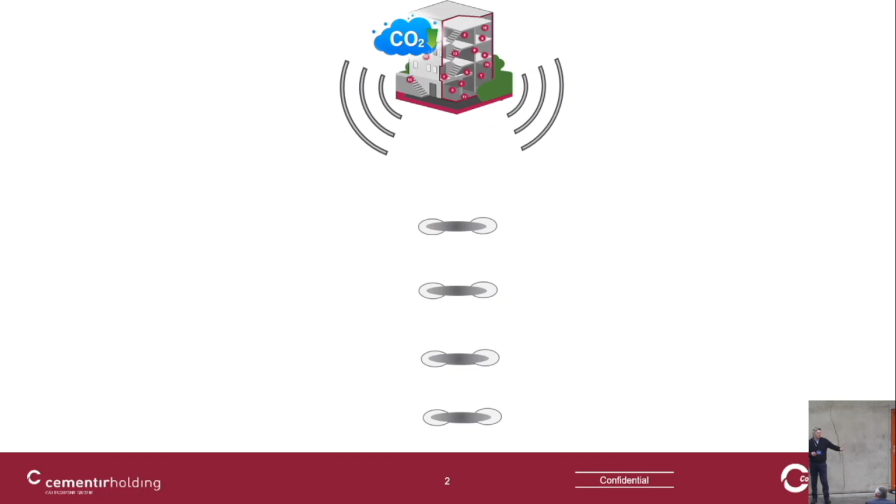Yesterday we understood that the key point is actually to reduce the CO2 emission per square meter in the building, and we can say our approach has two potential solutions.

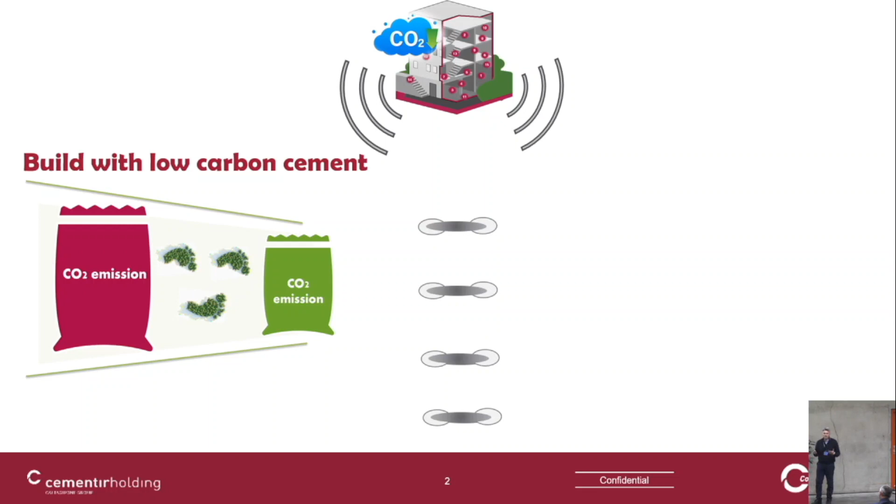One solution is simply to build with low carbon cement, reducing the CO2 emission per cubic meter and then per square meter by reducing the CO2 emission in the cement. The concept of 2A-LL cement, which will now be presented by Soren, works this way: we can have the same amount of concrete for a foundation, a slab, or an aesthetic wall, but using a cement with lower carbon.

So potentially we'll have lower carbon cement and lower carbon product. This is what we've listened to our customers to do - switching from CEM1 to CEM2, adding slag or so on, to get a potential CO2 emission in the binder lesser than before, while keeping the same material quantity.

The other concept is to build more with less material. In this case, the idea is to reduce the material itself, achieving higher strengths like with UHPC instead of traditional concrete. Instead of having a wall with a thickness of 35 centimeters, we could have a wall with 10 centimeters, and this is very important because we save the mass of the material.

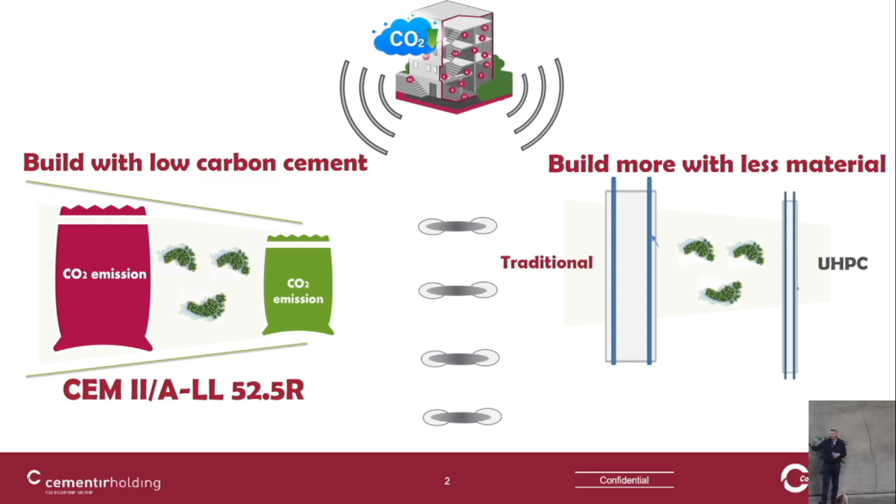So from the building point of view, the precast point of view, there's less CO2 emission per square meter in this case. This is the key point. There will be another presentation focused on the innovative solution based on UHPC - a solution pointing to saving material with better performance.

In our point of view, the first part is based on the customer, or based on us - we need to serve you a cement with lower carbon footprint that can suit your application, with a sort of fine-tuning to your production. It's an easier way and can be handled here.

The second one is more on the engineers, the final user, because you can save a square meter, but there's a calculation based on engineers, and the concept of building design. So it's more on the prescriptor - we need to go up.

In this case, it's more lobbying from the initial value chain going down. This is our way, as Michele mentioned before, to address sustainability. On one side, that's scope 1 as mentioned by Michele, so more on our side, to deliver a competitive product to you.

The other way is more a lobbying together with the customer and the prescriptor, to define a different way to design the concept of a new building. On both sides we have the cement, and also our InWhite solution that will be shared with you after lunch.

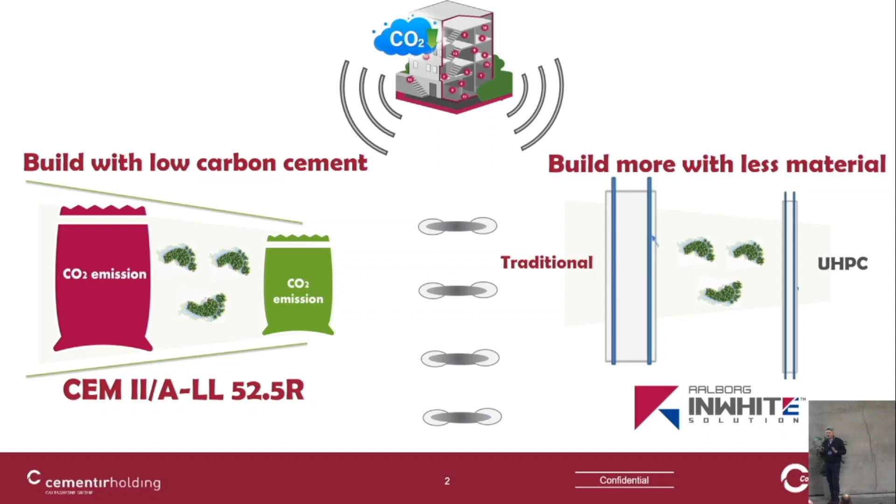We can do a lot of testing on mortar in our lab, according to the standard, but the reality is that the cement should fit into your production process.

Let me start by introducing myself. My name is Søren Rasmussen. I have been employed here at Aalborg Portland, and now Cementir, since '92, being part of our company's transition from a small Danish company to an international company. And now we are in this transition, this journey towards net zero CO2.

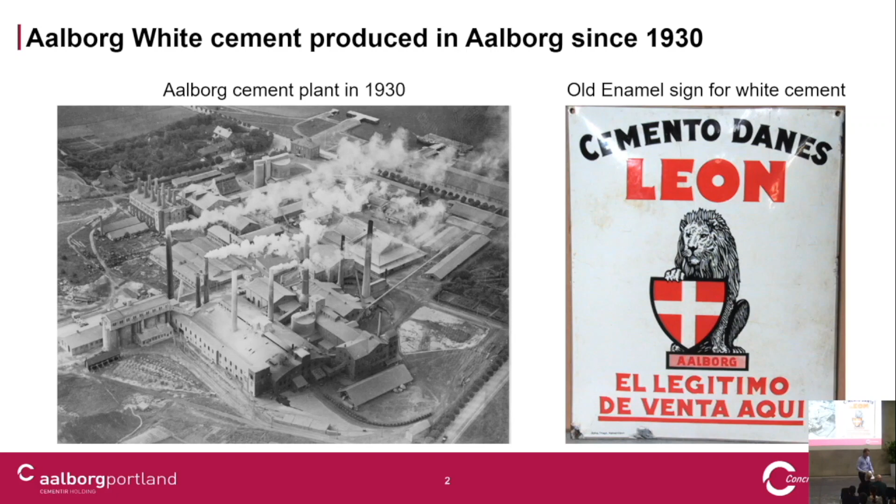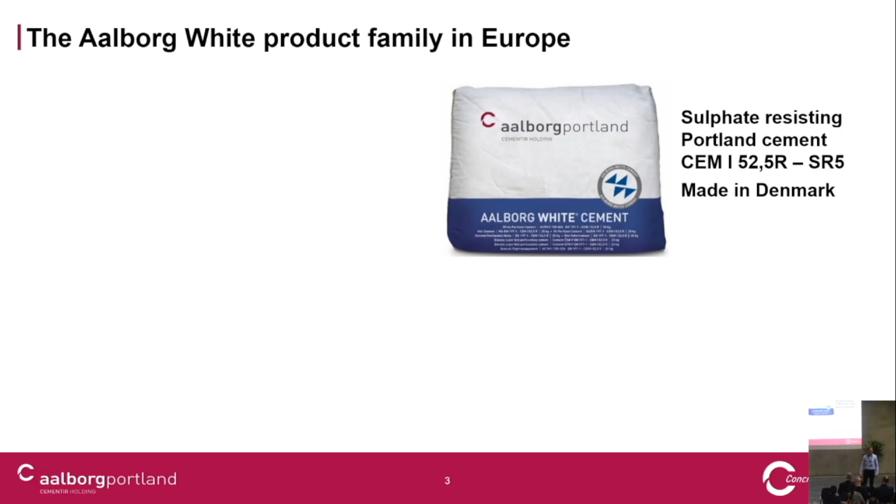Here at our plant today, we are producing the authentic Aalborg White cement, CEM 1 52.5R SR5, sulfate-resistant white cement, as we have been producing in that composition for at least 50 years, I guess. We also now supply white cement from Egypt: the CEM 1 52.5 and also a CEM 2B cement. And coming up next year, we are proud to supply you also a CEM 2A limestone cement, produced on the clinker we have here in Aalborg. So my presentation today is regarding the cement based on the clinker from Aalborg, not the Egypt cement.

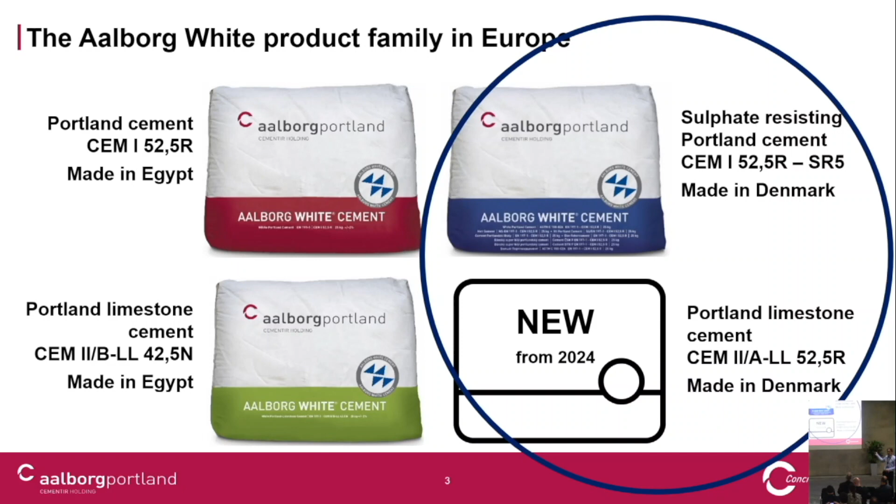What is unique here is our raw materials, and they are wet, as we learned from Michael this morning. We have wet chalk, and therefore it was also a wet process, but that fits our production best. We have wet kilns, meaning we supply the raw material in a slurry, poured into this long tube of a kiln, and that's how we produce the white clinker.

We can compare that to the dry kiln process, which is our grey production here, a dry or semi-dry process. Those two processes are different and have different benefits and disadvantages. With the wet kiln process, the disadvantage is the very high energy needed compared to grey, which is more energy efficient, and that's a huge disadvantage. But we also have benefits from the wet kiln process—the raw feed is in a slurry.

That means that we have all the raw materials, all the fine raw material particles, very intimately mixed together in suspension. So the feed into the kiln is more homogeneous than if we have powder raw meal fed into the kiln. In the wet kiln, we form very nice spherical nodules of uniform size, whereas in the dry kiln, we have a much more dusty clinker coming out, meaning that the sizes of the clinker are from dust to maybe bigger balls.

We have a long retention time in this kiln system. From entering to exit, it takes something like 6 hours for the material to go through, whereas in the dry kiln, it takes half an hour from start to exit. I'm tempted to say that we all know that slow cooking gives better food, and that's also the case maybe for our clinker, I hope.

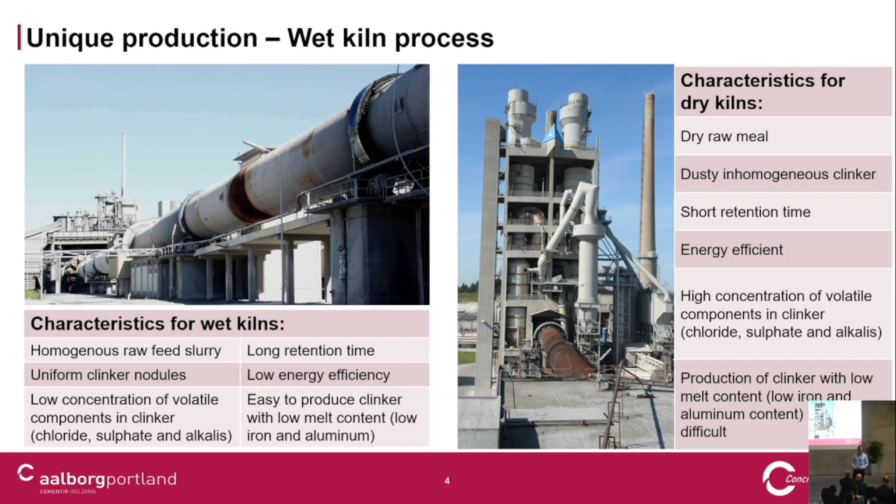And we have no iron in white cement, in white clinker. And in our special clinker, we have a low C3A. And that's only possible because of the wet kilns. So this is to show you an example of how it looks. Wet kiln, dry kiln, the clinker coming out here.

You should not compare the color, but you can compare the size. You can see here that these are small spherical clinker, not the same size, but at least a similar size. Whereas these clinker, which are from our Egypt plant, which is a dry plant, we see much more dust and also bigger clinker nodules than over here. And that's a difference. This is only possible in a wet kiln.

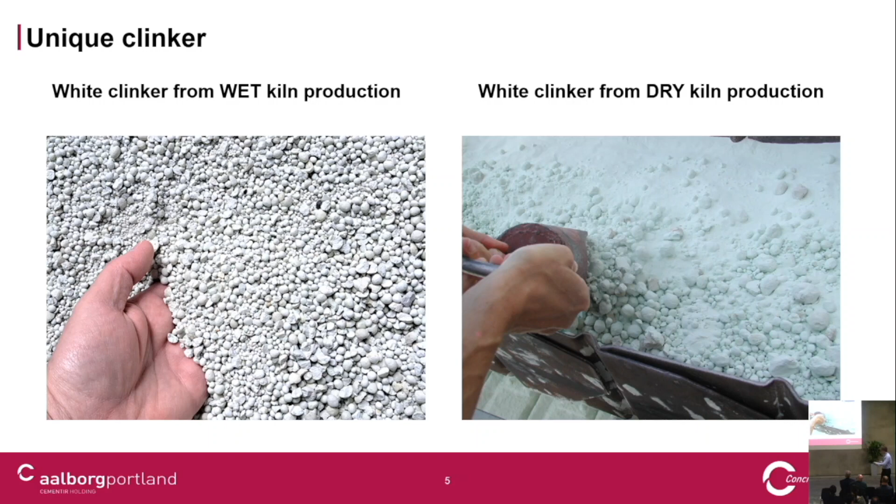And that's bad, but we have learned, Michael told us this morning, that we have a heat recovery system at our plant, so we actually recover 25% of the energy put into the kiln. So even though we have these wet kilns, our total energy balance is not that bad. And our EPD for the cement is not as bad as it would look at first glance.

And we produce gypsum, which is reused in our grey cement, recover the heat used for domestic heating, and also the dust from the white kiln with all those volatiles, high in alkali, high in sulfate, high in chloride, is also reused in our process.

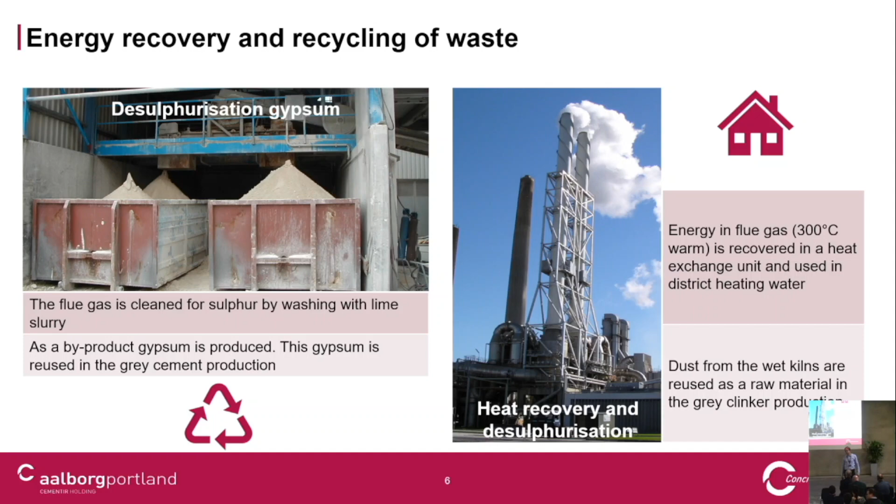So the byproduct gypsum, does that provide all the gypsum for Aalborg production? No, it's not enough. We use natural gypsum and we use desulfurization gypsum like this. And we also get gypsum from the power station nearby here. How much of your gypsum would be from this, approximately? I'm not sure about the number. 50%.

So that's the clinker. And what are the key properties of these clinker? Because of our process, high whiteness. Because of the uniformity in size, we can have more control of the heating, the temperature profile through the clinker, and also the cooling of the clinker is important, that we capture the high temperature phases and quench very quickly. And also the oxidation that is happening on the clinker. The iron is locked in a state where it has no color. Very small amount of iron is in there.

If it is oxidized, it turns black, and we don't want that. So it's important with the size of the clinker. Give us high whiteness. We have a very low C3A content. That's possible because of the technique. So we have a sulfate-resistant cement. Of course, we have zero iron phase. Otherwise, we will not be white.

We have a very high content of calcium silicate. That is the minerals that are giving the strength to the cement. Because we have no C4AF, we have very little C3A. Only what is left is calcium silicate. So that's why we can have much higher silicates contents than in a normal grey clinker.

Extremely low alkali content. When we say low alkali in Europe, you think about a cement that have 0.6 or less percent of alkalis. We have less than 0.2% of alkali. Extremely low chloride content is less than 0.01.

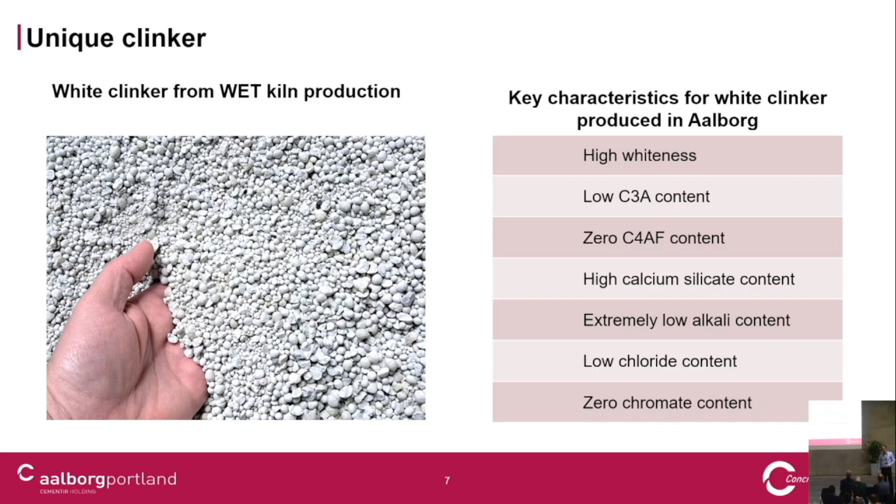Also, this is not because of the kiln technology, but we have zero chromate in this cement. That's because of the raw material. So there's no need to chromium neutralize our white cement. It's born without any chromium. So that's unique.

And if you look at the composition of our clinker, and see what does it do to the cement properties. Cement based on these clinker will have high strengths, especially the 28-day strengths will be high because of the very high content of calcium silicate and the low alkali. That give high strengths. The white cement on these clinker have more than 70 megapascal usually in 28-day strengths, and that's higher than almost every other cement.

The low C3A, that allows us to have a sulfate-resistant cement. The low alkali content, that allows us to have a cement that never will have harmful alkali-silica reaction. You will not see it with the white cement.

Also the low alkali, well, this is maybe a small thing, but when you have a cement which is sulfate-resistant with low C3A, you normally say, okay, but that cement is not good when you put it in seawater because it will not bind chloride because there is no aluminum to bind the chloride.

But it's not the truth here because with low alkali, very low alkali content, that changed the balance between how much chloride is in the pore solution and how much is in the silicate phases. With a low alkali, more chloride is bound by the silicate phases. So actually this cement also have a good chloride binding capacity.

Low C3A, low alkali, no C4AF. That means that this clinker in cement gives us a cement which has a very good affinity or very good compatibility with the superplasticizing admixtures.

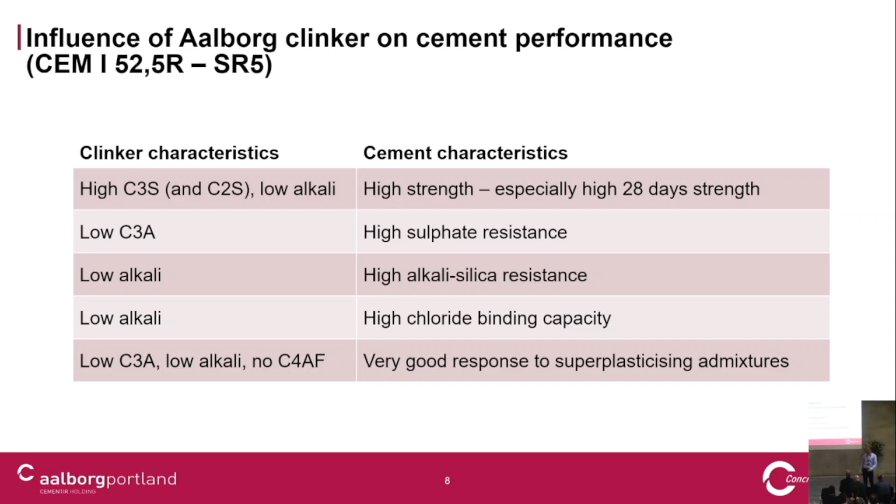You will see that when we try to compare concrete with our white cement with any other cement more or less, that you can always reduce the amount of superplasticizer needed in your concrete, very often to half the amount of superplasticizer. So instead of putting 5 or 6 or 7 kilograms per cubic meter of superplasticizer, you can go down to half and have the same fluidity, the same effect of the superplasticizer. And that effect we have tested in the laboratory.

This graph showing water-cement ratio in a concrete, and here it shows the dosage of a superplasticizer. And this is different cement, and this violet color is the Aalborg White from Denmark. The others are also white cement. But you see, these concrete are different concrete, but with the same flow, with the same consistency. So all the points here are representing a concrete with the same flow spread.

And if you have no superplasticizer, you need a lot of water, a high water cement ratio to have a concrete with a certain flow spread. Putting in superplasticizer, you can reduce the water and still have the same flow spread.

I need to stand over here.

Just to compare, if you look at, let's say we need a concrete with 0.45 in water cement ratio and a specific flow, then we should use around 0.4% of a superplasticizer with the cement from Aalborg. For all the other cement, we need a higher amount of superplasticizer to obtain the same flow with the same water cement ratio.

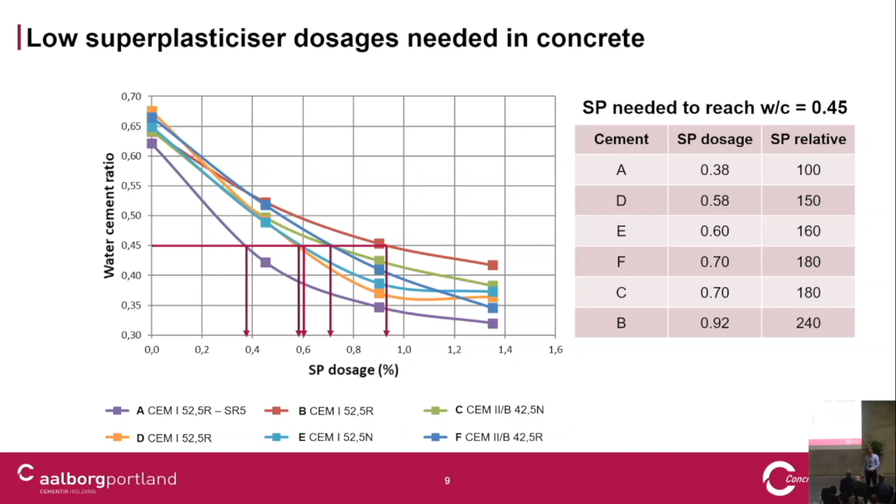This effect we will also transfer to our new limestone cement. And that brings me to the second half of the presentation. From next year, Aalborg White Limestone Cement CEM II/A-LL 52.5 R. We have designed this cement based on having two aims. One is, of course, to reduce our CO2 footprint.

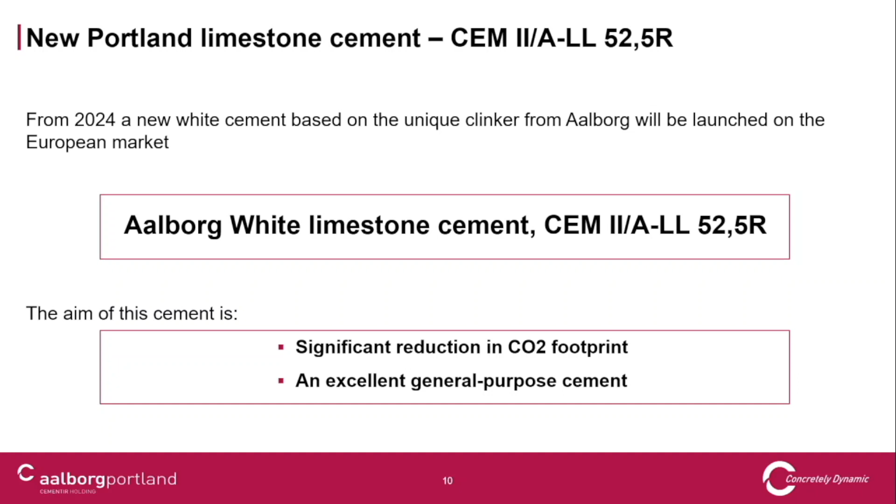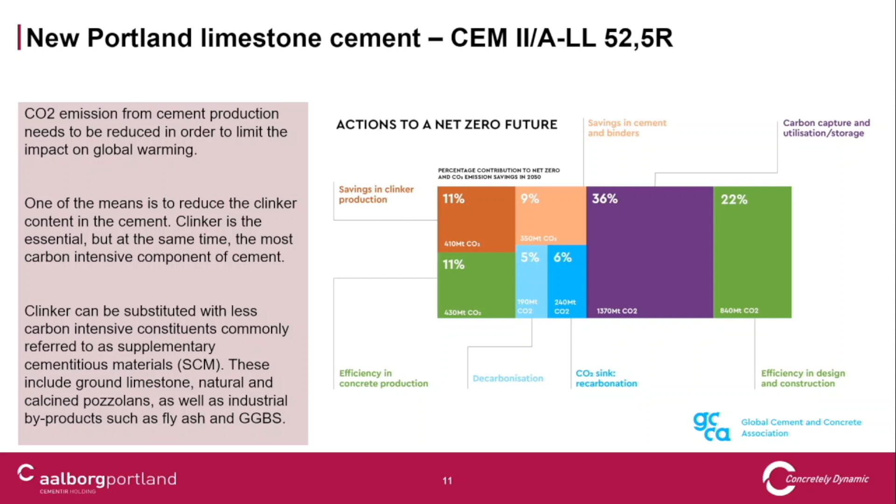So why limestone? Why is that the best option for us to put into our cement? Why not slag or something else? We need, of course, a replacement material which has high whiteness. We need a replacement material which has a good influence on strength, especially on our early strength. We would like this cement to have a good early strength. And often when you put in a pozzolanic material, you reduce the early strength.

We also need this material to have a good influence on rheology. When you put in calcined clay, sometimes calcined clay has a negative influence on rheology. So those are some of the considerations that we have made. And looking at different options of SCMs, supplementary cementitious materials that we could use, we could say limestone, slag, calcined clay, silica fume, or other, that could be fly ash.

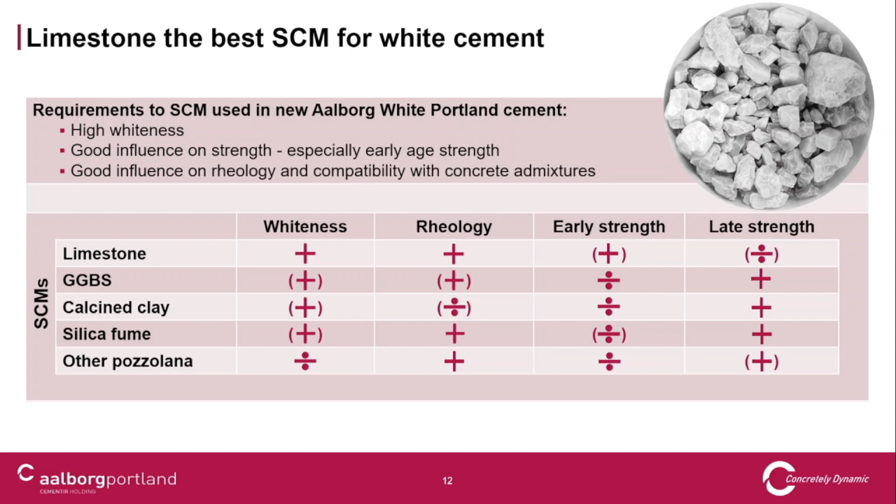Early strength: limestone has a good influence on early strength. All the others have a negative influence on early strength. And then late strength, limestone is not that good on late strength, but as we saw, our clinker has a very high late strength. It's okay for us to have a little bit of reduction of our 28-day strength. We don't need the supplementary material to contribute so much. So limestone for us is a good choice to put into the white cement.

And also here at the plant, we have a quite advanced milling facility for white cement production. Luke was asking about the particle size. Could it be better to grind these materials separately instead of co-grinding or blending? Now this is only limestone, it's not clay. But with our milling facility, which is shown here in a sketch, we actually have very good possibilities to co-grind the limestone and clinker.

And without going into details, our milling facility is not just a ball mill. It consists of a roller press where everything goes through and is pre-crushed. Then it goes into a two-chamber ball mill, but then the materials go through a separator. So we can control how much of the largest particles are separated and returned to the ball mill. We can decide the fraction, how big the particles should be that are returned.

And also the separator is driven by cold air. We are cooling the cement, so we are controlling the dewatering of the gypsum, how much semi-hydrate will be in the final cement. It's also part of varying the properties of the cement. So with this setup, we are ready to make a limestone cement based on the white clinker.

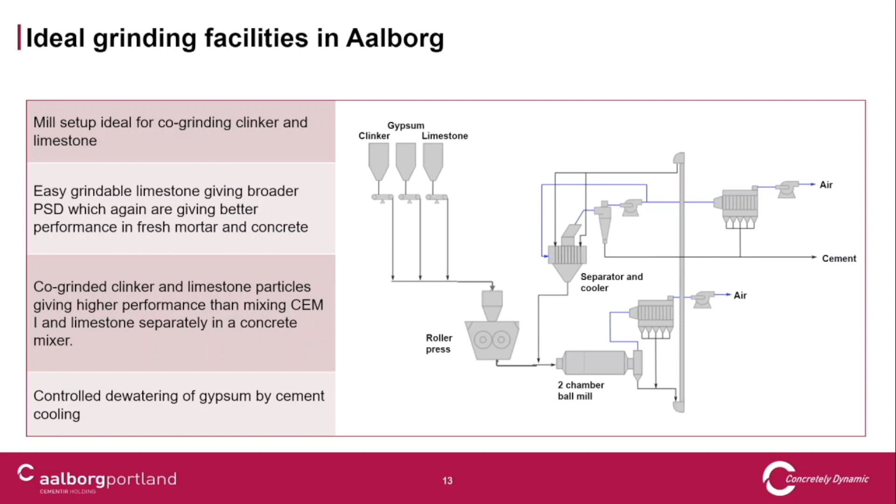And by this process, we also see an increased effect of the limestone compared to just adding those two, limestone and cement, separately. We have a good intimate mixing of the limestone particles and the clinker particles when we co-grind it instead of blending it.

Many say that, okay, limestone is an inert filler. It doesn't do anything. It's like putting sand into your cement. It's not a pozzolanic material. And you're right, it's not a pozzolanic material in the classic sense, but it actually does contribute to the cement performance in a positive way. We see that limestone has actually 3 different effects on the cement performance.

We are talking about a nucleation effect, where the limestone is helping in the beginning to have cement reaction products formed. We're also talking about a chemical effect, that there is actually some reaction between limestone and cement minerals forming new materials. So it is not pozzolanic, but there is a chemical reaction which is helping, and there's a filler effect.

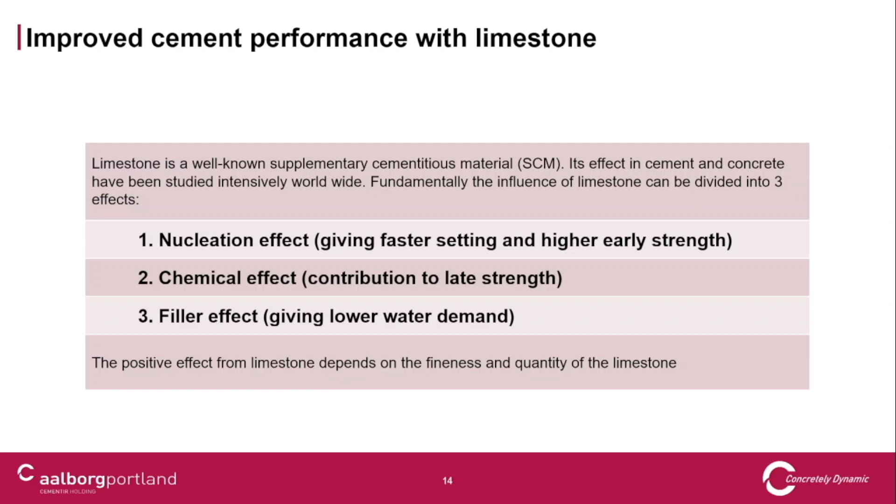So the nucleation effect is seen on this graph. We saw something similar yesterday in the laboratory where I was showing the calorimeter, measuring how much energy is liberated within the first 24 hours after mixing with water. This is not our own work, but it shows replacing 50% of the cement with either limestone, quartz, or fly ash. What happens to the reaction?

With the neat Portland cement, we have a heat or energy release starting at 4 hours, and then the black curve shows the release of energy from the reaction of the cement. Putting in quartz or fly ash doesn't change very much, but putting in limestone, everything is moved to a faster reaction. That's the nucleation effect of the limestone.

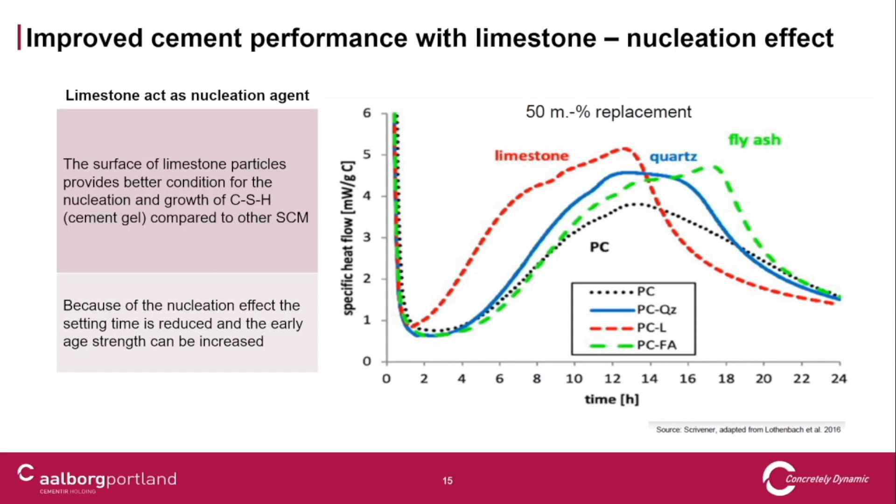That is also used by some of the admixture producers in new accelerators, where they use nanosilicate or nano calcium hydroxide particles to accelerate concrete. This is not nanoparticles, but at least it's fine small particles which act in the same way as nucleation sites for the chemical reaction. So this effect we will see in our cement.

The chemical effect is another, that is that a small part of the calcium carbonate will dissolve and react with the aluminum phase in the cement, forming what is known as hemicarbonate or monocarbonate. This slightly complicated graph shows the amount of carbonate in the system and which minerals are formed. And this is a slow process, so this happens after weeks, but before 28 days.

And what happens is that those new reaction products actually increase the volume which is formed. And if you have the same confined space, more volume means less porosity. So when this reaction happens, that is what I'm showing with the dotted curve, the total volume of the system is higher, and that is why we have a positive influence on the strength.

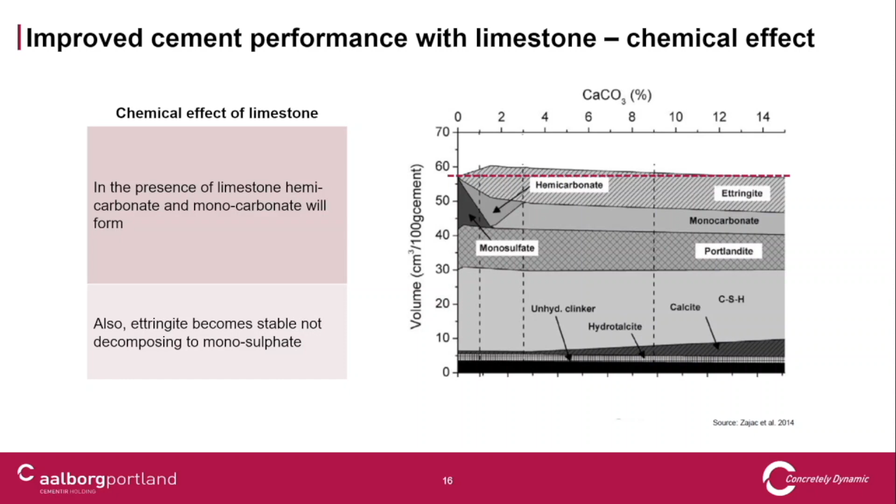So at around 2% of calcium carbonate, we have an optimum with the highest influence on strength, but all the way up to around 10% of carbonate, we can expect a positive influence on strength. And then the last one is maybe the most obvious: small particles being able to fit in between larger clinker particles give us a filler effect.

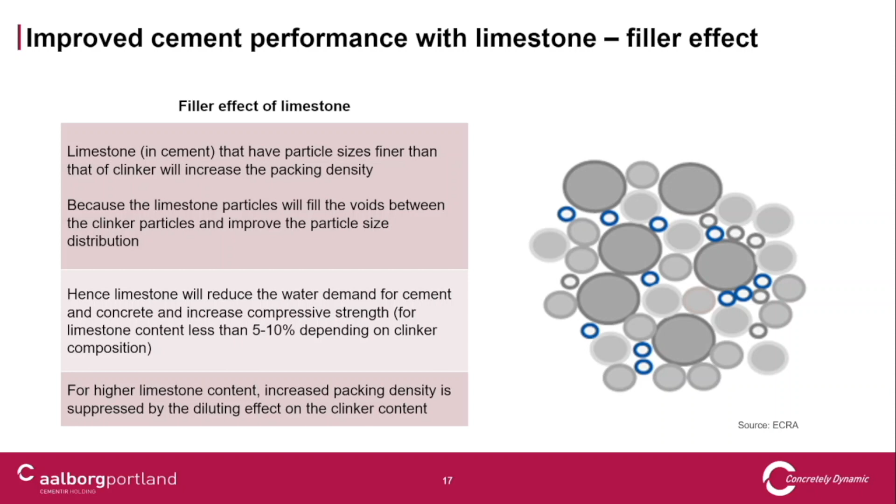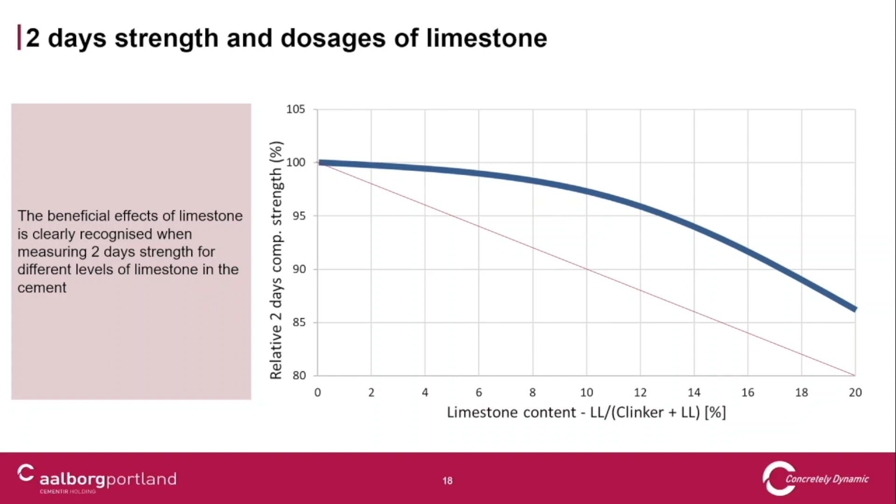And what should be expected if there was no effect of the limestone should be, of course, a gradual decrease in strength corresponding to the amount of replacement, corresponding to the amount of limestone put in. But that is not what we see. We see that the strength is actually almost not influenced with the low amount of limestone, up until around 10% before we really see a decrease in 2 days strength. So putting in limestone can give us the possibility to have high early strength with much less clinker.

So even though we have not produced this cement full scale, we have done it in laboratory, and we also have experience from our grey production. This is what we predict the new cement's properties will be. If you look compared to the cement from Aalborg today and the two Egypt cements, 1 day strength, 22 megapascal, 23, 25. So we will have more or less the same 1 day strength as for the CEM I cements. And the fineness will not be much higher. And we also see that the setting time should be a little bit reduced because of the nucleation effect.

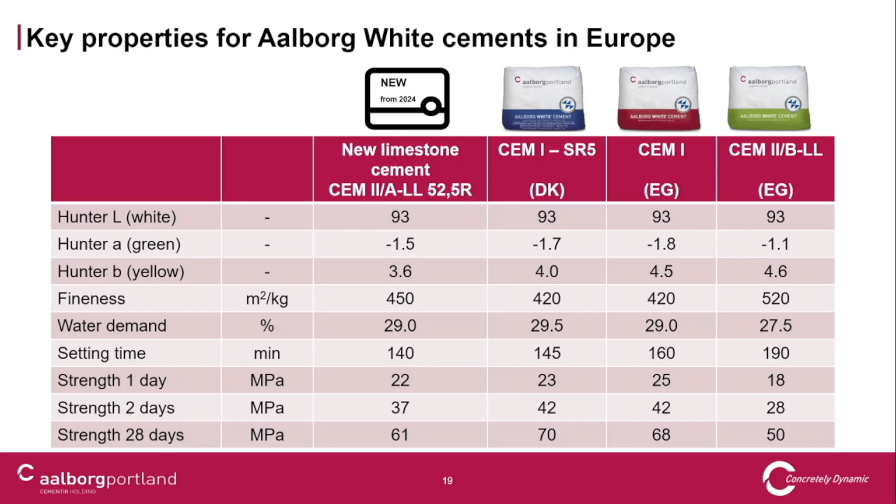What else? Water demand, we don't expect the water demand to go up. We actually expect it to be a little bit reduced. These numbers tell us the color of the cement, white, how green, how yellow. And because we use a very high quality limestone, we expect maybe not the whiteness, but the tone of the green and yellow to be reduced a little bit. Again, based on what we have done in laboratory, but also based on our long-term experience with limestone-filled cement in Denmark. We started back in '95 with the first limestone-filled cement.

What we see is that for semi-dry cast concrete products, this type of cement will be very good. We expect to have improved strength. We expect to have a more stable, freshly cast product. You can put in more water maybe to the product without losing the form stability. This cement we expect to be good in precast, semi-dry cast products.

What else? Wet cast concrete, precast concrete elements. Also here we expect this cement to have a beneficial effect, mainly in self-compacting concrete. What we know from our present cement here is that the tendency to bleeding, the tendency to segregation when you make self-compacting concrete can be a challenge. But now when we have, let's say, 15% of finely ground limestone, we will have a more robust, less segregating, less bleeding concrete. And that will be good for concrete elements.

Then I have mentioned bricklaying mortar, and we also know that when we have the fine material in those types of products, the workability and the consistency of these materials, grout mortar, bricklaying mortar, masonry mortar, is improved. So we also hope that this will be a segment for this cement.

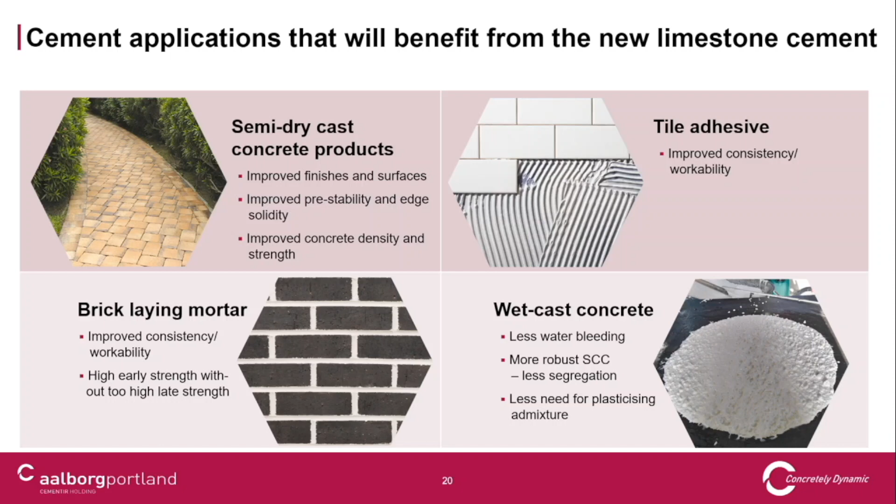And then you saw yesterday also that there was a display of tile adhesive where we test different cements. We also think that this new cement will have an improved effect on workability for tile adhesives. But there is more than workability. There's a lot of things that need to be fulfilled for tile adhesive. So what I am looking forward to is coming autumn and next year, when you have the chance to test this cement to see what the results will be.

Okay, so to sum it up, our new cement will benefit from our White Clinker here in Aalborg, those special properties that it has because of our process, and not least because of our raw materials. I have not talked about our raw materials, but that of course is also very important for the clinker. Together with a high quality limestone, we hope this cement will be maybe the preferred one in the future. I don't know if that's good to say, but that could be a wish from my side.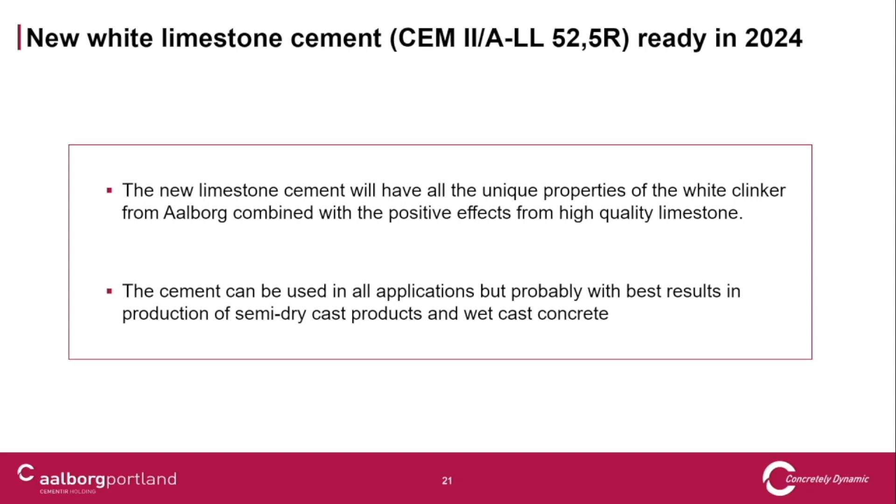And we see this cement as an opportunity. It can be used for all applications. It will have maybe more benefits for some applications than others, but in general, this cement could be used in all applications. And that was the last one.